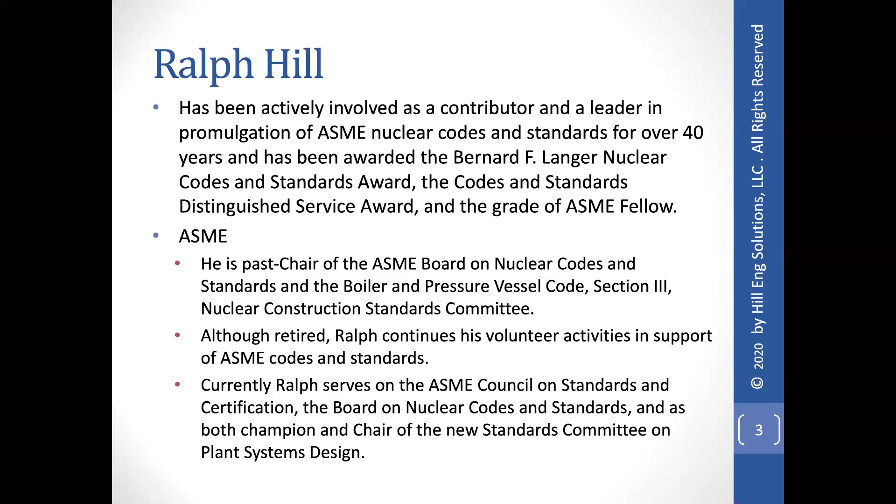Currently I'm on the ASME Council on Standards and Certification. I'm also on the Board on Nuclear Codes and Standards. And most importantly to me, where my heart is, I'm champion and chair of the new Standards Committee on Plant Systems Design, which is the subject of this presentation. In ANS, I've been a member of the working group on ANS 30.1 for a couple of years now, and 30.2 is being reconstituted, so I'm supporting that. And of course, I'm a member of RP3C.

Let me start off. I've been a champion of risk-informed lifecycle design concepts for over 20 years. And considering the many initiatives today and in recent times to support advanced plants, I think the time to implement risk-informed lifecycle design concepts is now. Initiatives include the Licensing Modernization Project, the new NRC Part 53 that's just started out, as well as the ANS and ASME initiatives to provide standards that are more relevant to the unique and varied safety cases for the advanced plant designs.

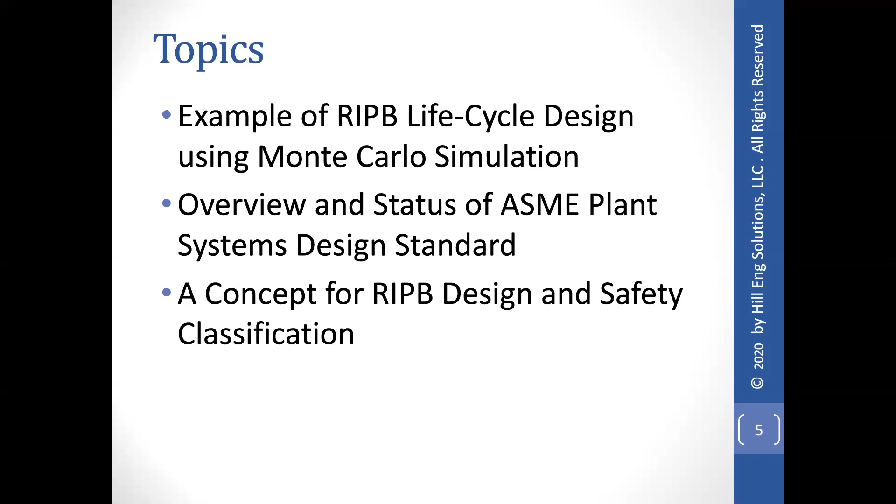In addition to providing an overview and status of the ASME Plant Systems Design Standard, this presentation is also my attempt to put some pieces together to provide a concept for risk-informed lifecycle design that also incorporates the risk-informed performance-based principles that Prasad has introduced.

So, first of all, we're going to do an example of where risk-informed design actually has been performed. This was done, believe it or not, 17 years ago. We used a Monte Carlo simulation tool called GoldSim for a very simple fluid injection system where the model and assumptions were out of the blue. They were good engineering estimates, but they're not relevant to any actual design parameters. And it's for demonstration of the technique only.

It shows how the system can be analyzed in a risk-informed approach. It's applicable to all types of systems of varying levels of complexity. And it can be applied at multiple levels ranging from entire system to a subsystem, down to the level where requirements are actually defined.

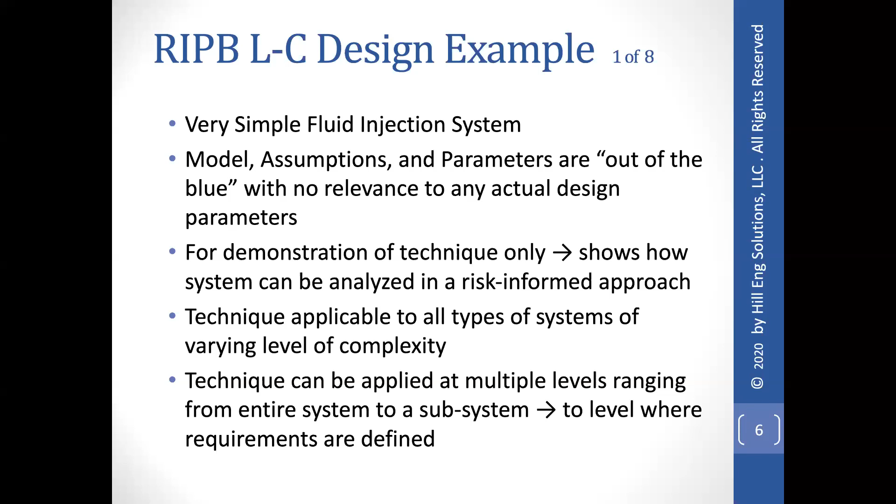So the top level requirement for this system, it's a fluid injection system, and you see the schematic here, is to be able to inject 200 gallons per minute with a mean reliability greater than 95%. On the left, you'll see the charging tanks with pumps and valves feeding into the injection tanks of 4 trains, with injection pumps and injection valves then feeding into the plant.

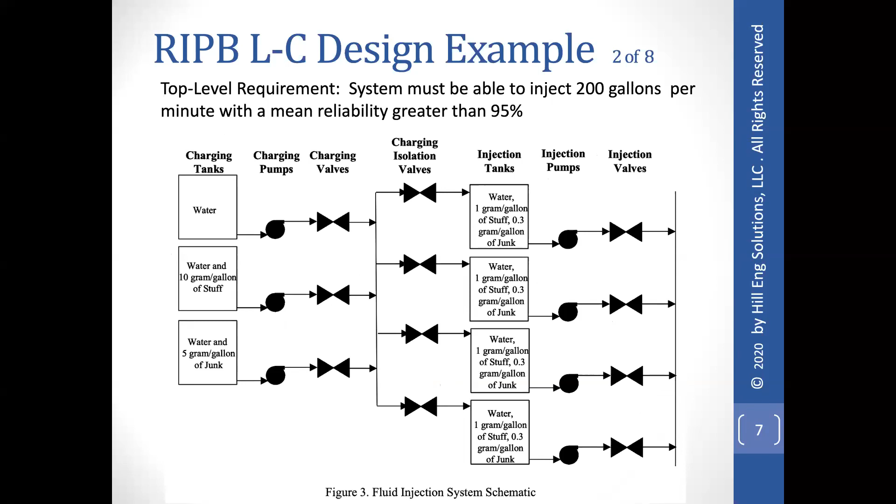So there's a number of general assumptions on component failure, modeled simplistically with Poisson distributions. The initial failure rate depends on component quality. Failure rate increases exponentially with time following any maintenance or repair. Doubling time depends upon the component quality. We have the pumps fouling at a rate that depends upon component quality again.

Maintenance occurs at selected intervals unless inspection reveals failure rate is above the target level. Inspection occurs at sub-intervals of maintenance intervals. And when inspection occurs, there's a probability that it misses the fact that failure frequency is too high. So, not totally unrealistic.

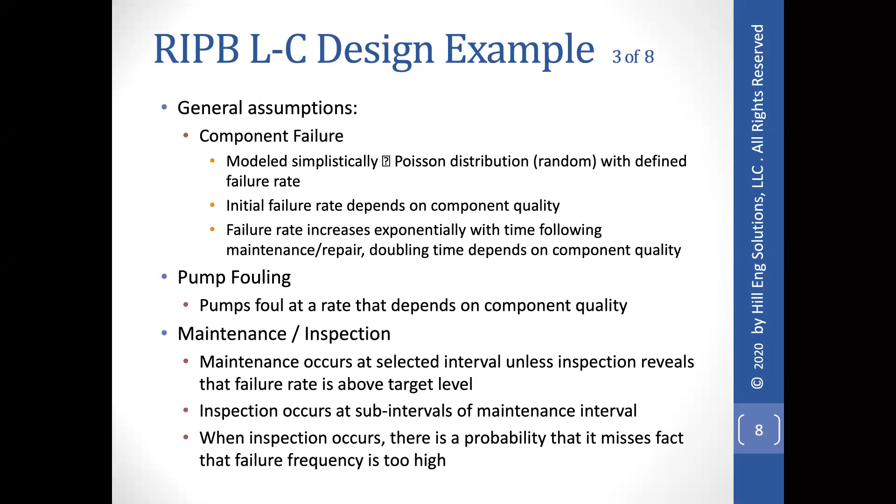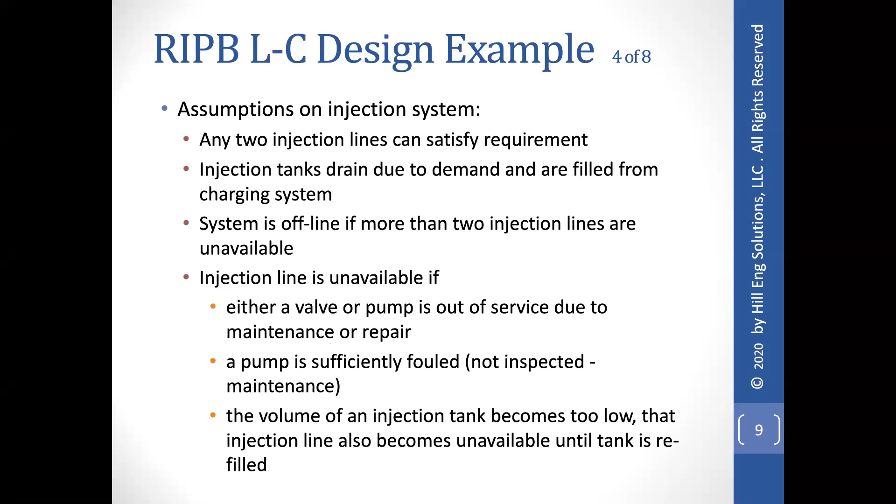In regards to the injection system itself, the assumptions: any 2 lines can satisfy the requirement. The tanks drain due to demand and are filled from the charging system. System is offline if more than 2 injection lines are unavailable. An injection line is unavailable if either a valve or pump is out of service, a pump is sufficiently fouled, or the volume of a tank becomes too low.

Then assumptions on the charging system: if any component is out of service, injection tanks cannot be filled. They can be out of service due to maintenance or repair. The charging pumps are also out of service if sufficiently fouled.

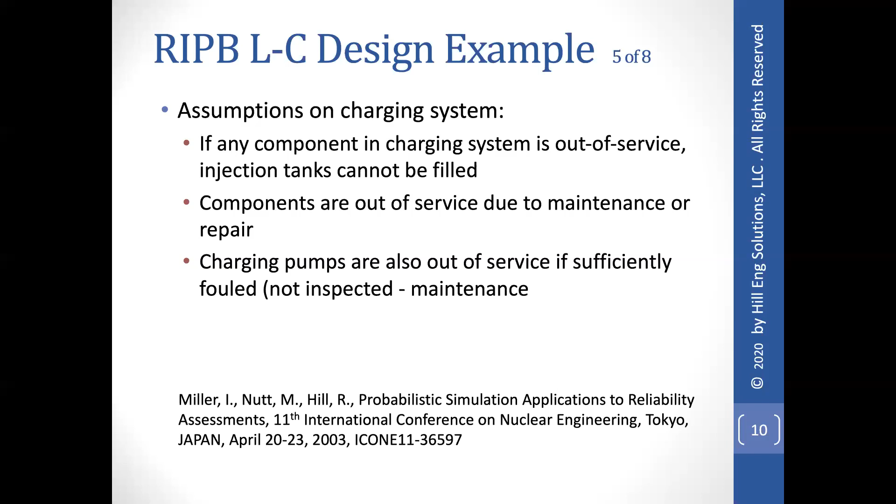I had to find a place to stick the citation for the paper where we published this. You can see we did it at the International Conference on Nuclear Engineering, ICONE 11, back in Tokyo in 2003. So, the model is still as valid today as it was then.

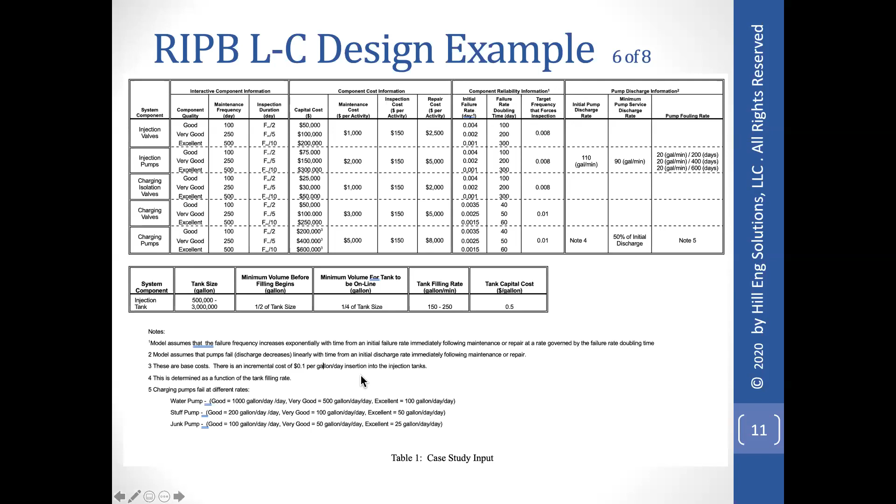So what about the results? The results are shown here. Again, at the top 3 rows, you see all component qualities were excellent, with different maintenance frequencies and different inspection frequencies. Injection tank volume was static for all 3, and input rate the same. Now you see your system reliability results.

For the first row with the inspection frequency of 50, we had 95.3% mean. Then we had 94.7% mean for inspection frequency of 250 days, and for a frequency of 25 days, 95.2% reliability. So the key here is that the choice of component quality and injection tank design parameters results in a system reliability that meets the performance regardless of the maintenance inspection intervals.

Remember, our initial performance criteria was 95%. However, there's still an approximate 50% chance of the system reliability being greater than 95%. An analysis of the results indicates that overall reliability is controlled by the reliability of the injection tank.

And then the following cases, which we won't go into here, consider larger injection tanks, and you can see you get larger mean system reliability results with larger tanks. So I think this very well illustrates the value of a tool like this in evaluating a system from a design standpoint, from a trade study standpoint — invaluable — and it also provides insights into the reliability of a system.

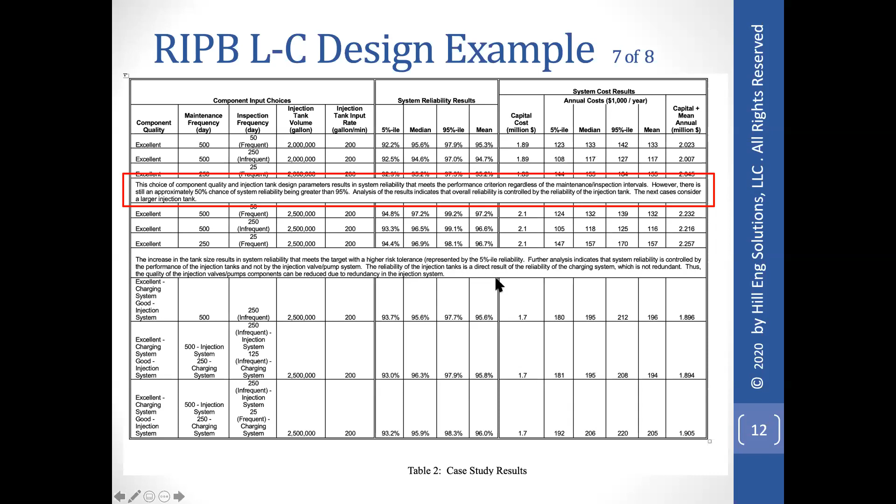So in summary, in this area, what do the results say? Excellent components, frequent maintenance and inspection, large injection tank can meet the goal with ample margin. But the case we looked at, the system would be over-designed, so it could have a significant cost associated with it that we might be able to save by looking more critically and refining the design.

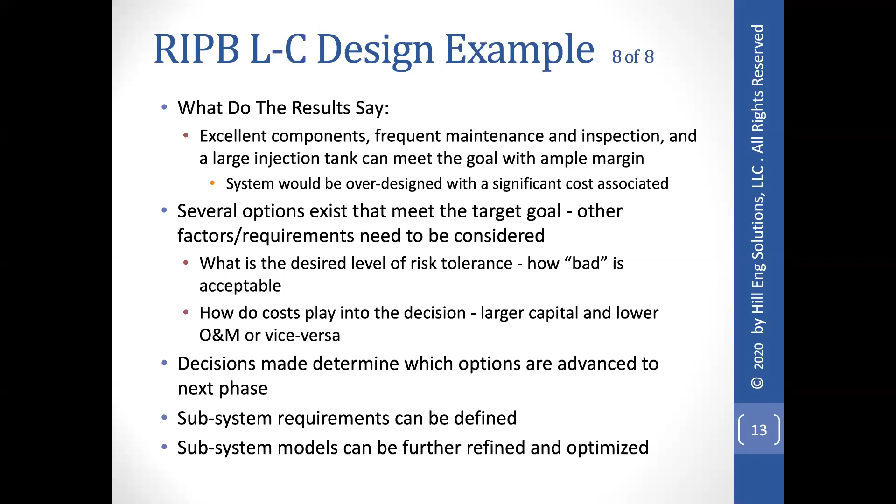So with that, I'll pause and take a couple Q&As before we move on.

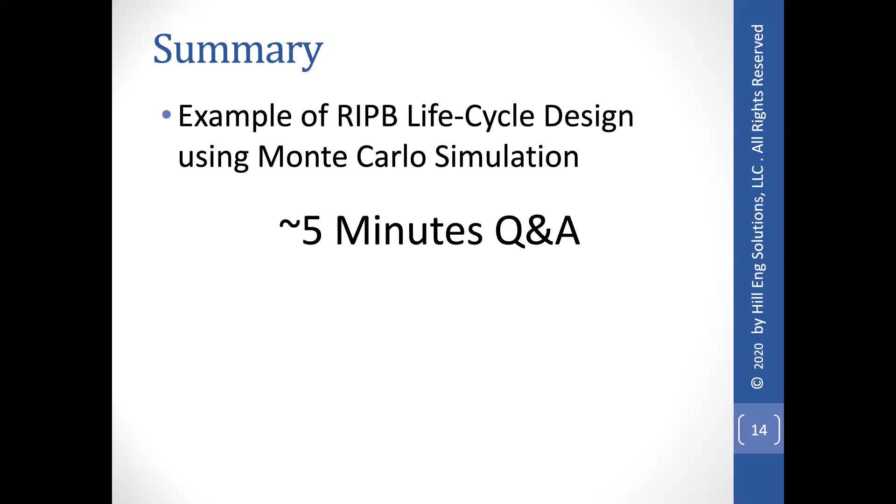So the next section we're going to look at is the overview and status of the ASME Plant Systems Design Standard. The problem we're addressing is that new plants and facilities with potential for significant environmental, safety, and health hazards to the worker and the public may not be built here in the US unless we can bring down the cost of license, design, and construct, while still ensuring safety of the worker, the public, and the environment.

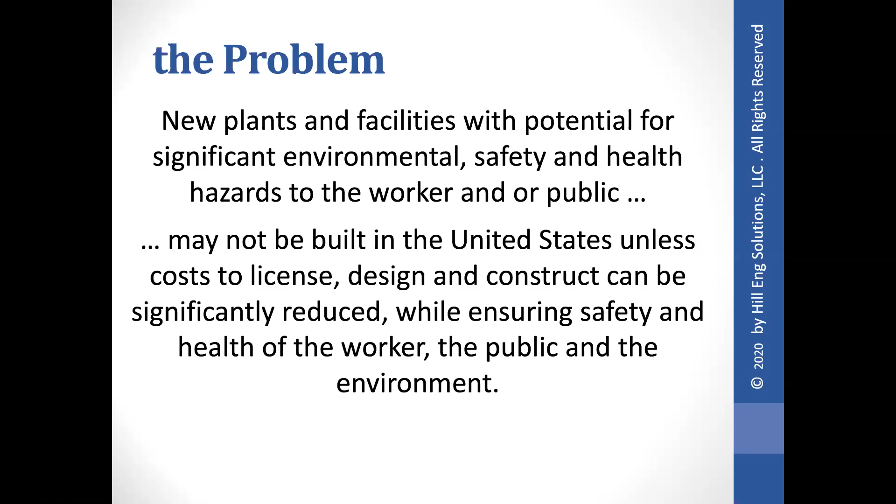When we talk about hazardous plants for the purposes of our standard, we're talking about plants and facilities that include nuclear, fossil power, chemical, petrochemical, compressed liquefied natural gas, hazardous waste, and perhaps others. So we're tech neutral, not just nuclear. And of course we're tech neutral within the nuclear community also.

So the solution is a tech neutral standard that provides a framework, including requirements and guidance for design organizations to do three things: conduct plant process hazard analysis in the early stages of plant design that advances as the design matures, and provide structure to the initial development of a quantitative risk assessment.

Secondly, incorporate systems engineering design processes, practices, and tools with traditional architect engineer design processes, practices, and tools. Thirdly, incorporate risk-informed probabilistic design methodologies with traditional deterministic design methods using reliability and availability targets.

And integrating these into a design organization's existing design processes and procedures. We're not telling them to throw out everything they've got. We're telling them to bring in some improvements to bring down potential costs.

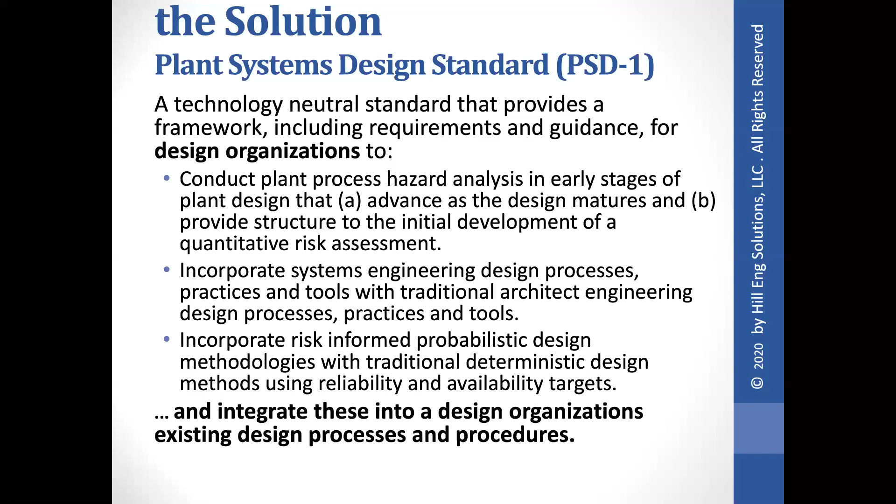We all know it's the costs in the final or detailed design stage - the errors we catch there, those we catch in construction or in startup and test or commissioning - those are the ones that cost us the most. So the focus of this standard is to bring down the potential for those errors to occur and thereby reduce the cost of construction.

Here we see an influence diagram that shows the relationship between the three technical areas in the standard in relationship to plant design. Remember, those technical areas were early hazards analysis leading to quantitative risk analysis, systems engineering, and probabilistic design.

So here you see systems engineering encompasses the entire process from pre-conceptual design through final design and support to construction, startup, and commissioning. That's the design, field change requests, things like that, feedback in, and we have to handle those.

The plant hazard analysis provides qualitative plant risk evaluations during early stages of design, supporting the quantitative PRA or QRA or PSA analysis in later stages of design.

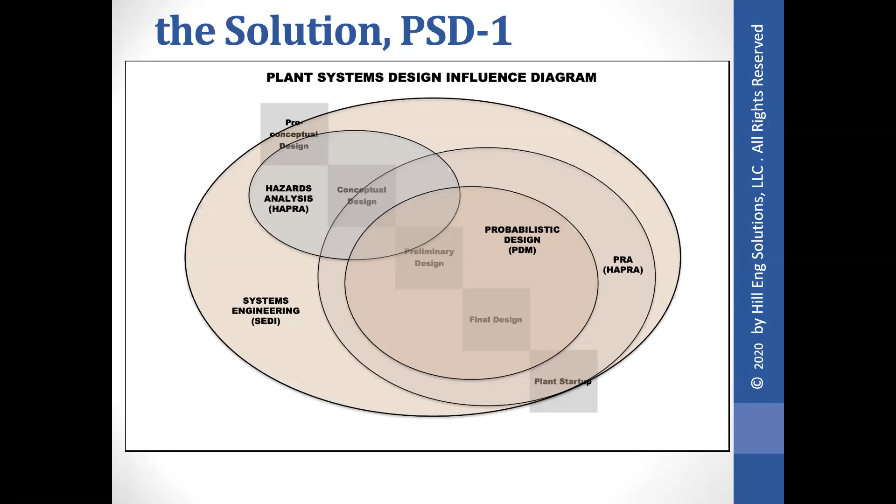And the probabilistic design methods has the greatest applicability in the later stages of design, probably really more in final or detailed design. And all three technical areas support field changes during construction, startup, and commissioning.

So the objectives are safer and more efficient designs and design alternatives with quantified safety levels. Now, in the past, or with current design techniques, ASME code, et cetera, we can't quantify the risk of one system design versus another, or the risk of the plant.

But using the type of Monte Carlo simulation we showed at the beginning of this presentation, we can start to do that.

More effective requirements management - in my experience, over 40 plus years in the industry, that's an area where typical architect engineer processes have fallen down. These would include assumptions, what we call TBDs - to be determined - and TBVs.

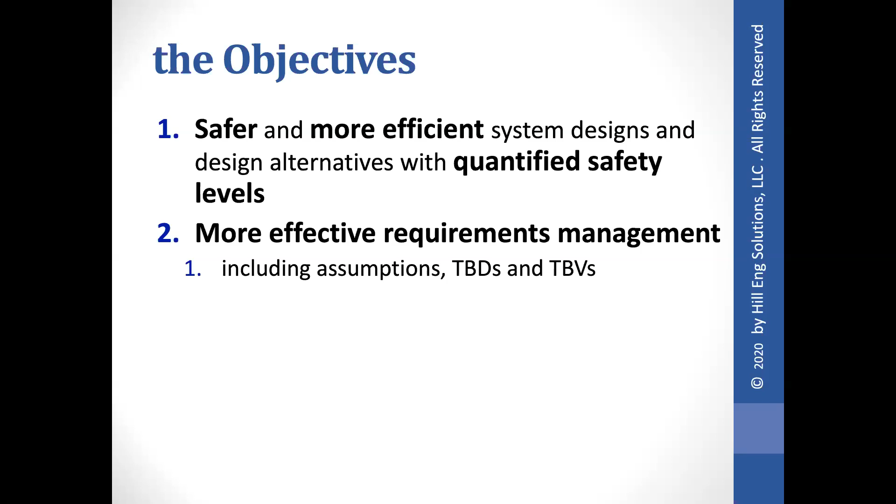So you have a high level specification with a piece of information that is either an assumption or we're not sure about it or needs to be verified. Tracking those things through the myriad hierarchy of documents we developed during design has sometimes been very difficult to do.

Covering the entire life cycle of a plant design: construction, operation, decontamination, and decommissioning. And be system-based versus component-based, and inclusive of multiple disciplines: mechanical, electrical, I&C, et cetera. Typically, ASME standards have not been system-based, they've been component-based.

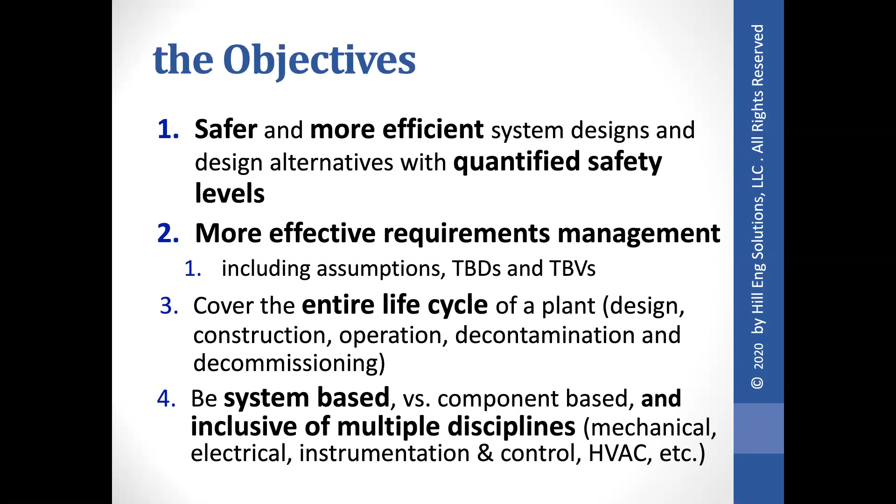Now, there are a number of related initiatives, of which what you see on your screen here is just a few, to what we're doing with the Plant Systems Design Standard.

We already mentioned Licensing Modernization Project, NEI 1804, Reg Guide 1233, Part 53, the risk informed safety categorization process of 50.69. ANS has a number of standards, including 30.1 and 30.2. The EPRI body of knowledge talks about evolving through hazard analyses, evolving to support as building blocks for PRAs.

The ASME Board on Pressure Technology Codes and Standards, covering Section 1, Section 8, and so on, has a task group on risk-based design that's identifying areas and recommendations for Section 1 and Section 8 to incorporate risk-based design into their standards at some point in the future.

And then Section 11 of the ASME Code for in-service inspection, Division 2, which is fairly new, about a year or so old, has the RIM program, or requirements for reliability and integrity management for nuclear power plants, that also is risk informed.

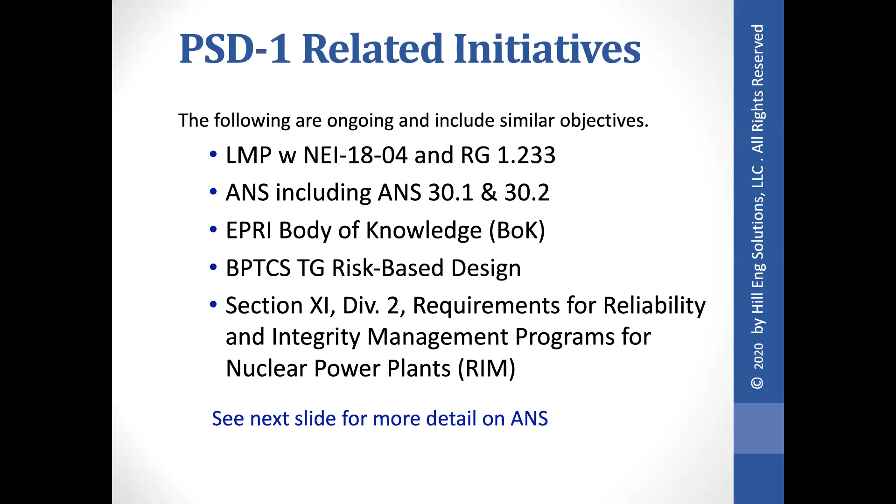Now, relative to the ANS, they're developing a series of standards to support new plant designs. This graphic shows the three top level standards, addressing risk and performance objectives, categorization of structures, systems, and components, and risk-informed decision-making. They provide requirements and guidance to the next tier of standards that address reactor-specific designs: fluoride, salt-cooled, liquid molten salt, helium-cooled, et cetera.

At the very bottom of the graphic, you'll see reference to other standards, including cross-cutting topics. This is where the Plant Systems Design Standard integrates into the ANS standards development planning, as shown in this figure. An architect engineering firm would use the applicable ANS standards in conjunction with the Plant System Design Standard.

Now, I do recognize this slide. I got it from Mark Linn about 18 months ago as part of ANS 30.1, and it's old and probably not current, but I think the message here is very relevant.

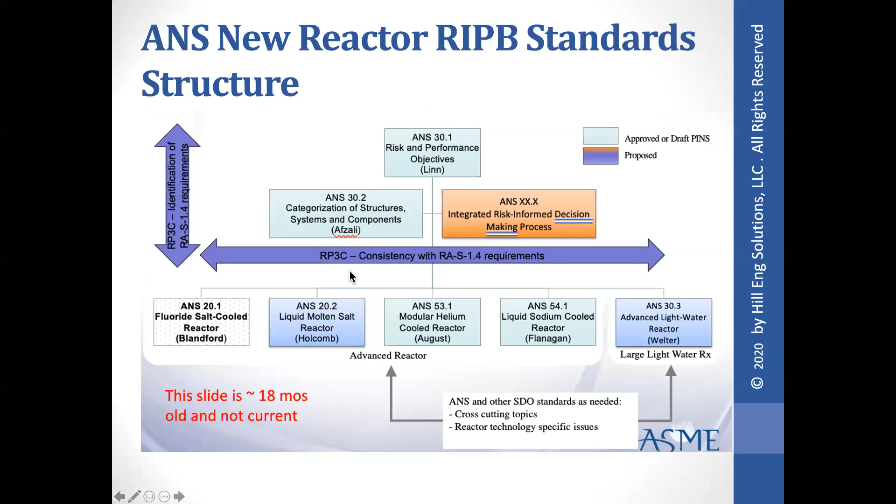The focus of our first year with the Plant System Design Standard has been detailed planning. By the way, we got approved as a standards committee in July of 2019, so we're a little over a year old. Our first year was detailed planning of the content, spending the whole year planning what the content was going to be around those three technical areas, doing brainstorming sessions and developing a roadmap for each of the three technical areas.

The roadmaps and process flow diagrams were used to develop work breakdown structured data sheets with descriptions of each part of the standard and identification of inputs from and outputs to other parts of the standard. So we did all this detailed planning. The block flow diagrams and N-square diagrams are being used to integrate activities within each technical area and to integrate the technical areas together.

In the past months, we have been importing this information into InnoSlate, which is a model-based systems engineering cloud-based software tool to plan and organize the contents.

I probably went a little bit too fast. Progress to date: we are essentially complete with planning each of the three technical areas and are doing final edits to the planning information we imported into InnoSlate.

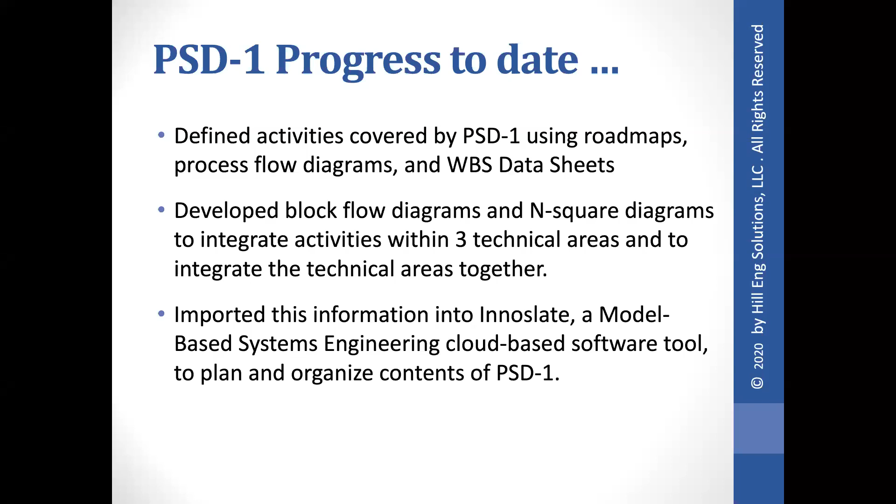A few months ago, volunteers began writing the first sections of part 2. Results are being used to provide guidance to other working groups. As of today's presentation, initial drafts have begun in all three technical areas, so we're beyond just our planning stages—we're actually starting to write in parallel with finalizing an integrated schedule.

Let's see, I got out of sync here a little bit. Okay, so...

Again, back to InnoSlate, the software tool that we're using. It enables us to better identify the interrelationships between different parts of our standard, as we mentioned. What you're seeing here is an InnoSlate generated action diagram. Here, where you see the acronym SIP, it stands for Site Infrastructure Plant, which is the highest level we use in our taxonomy for the standard.

Plant level of requirement. The green shaded parallelograms represent inputs to or outputs from the blue shaded activity block. So this is actually a part of the standard that we will be writing and started writing in the area of hazards analysis and evaluation.

In the early conceptual design development stage, after we receive the contract technical requirements, et cetera, we identify the hazards and causes, develop the event sequences, evaluate the event frequencies, the consequences. We identify barrier functions to either prevent or mitigate those consequences. We characterize those risks, and obviously there's do loops in this process. And then we validate those risks.

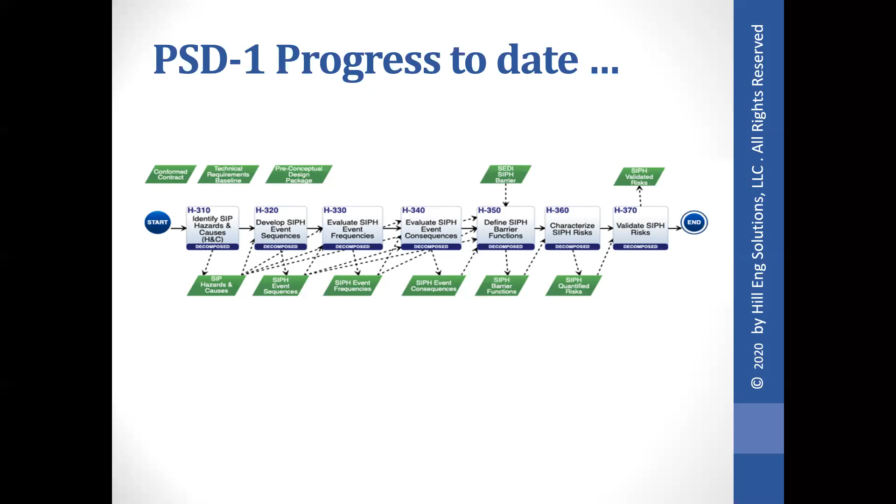The output from these activities feeds into the functional baseline, which is then the basis for the next stage of design development, which you can think of as preliminary design or development of the allocated baseline, if you are familiar with that terminology. So this is typically the way we planned our work and how we'll be writing sections around each one of these. And you can see there, each of these is decomposed into more detail also, and covered in the descriptions and material in the standard. And I already covered this.

So we'll now talk a little bit about the structure of the standard, looking at the process overview, our taxonomy and baselines, our hierarchy of documents and products, a little bit more on use of Innoslate. I want to show you an example of the Part 2 content and show you the section in Part 1 that discusses risk-informed performance-based design.

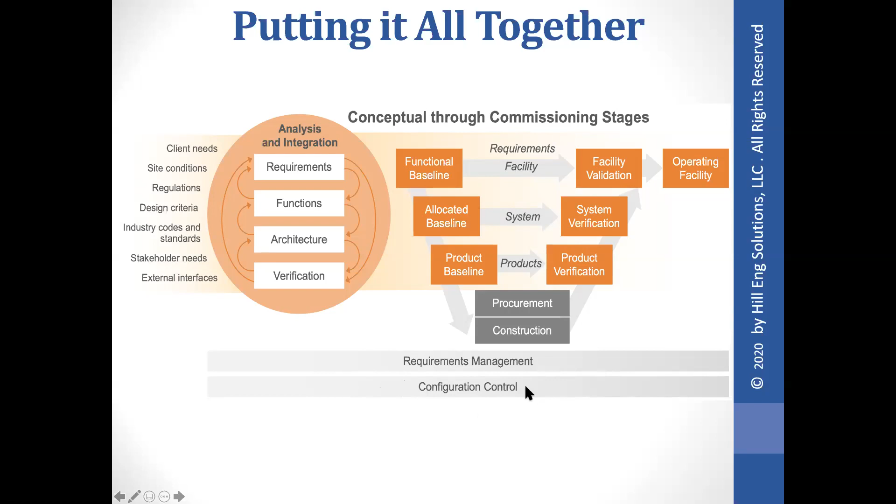Now, all of this work is underpinned by good requirements management and configuration control. And the standard is not going to talk about these programs. It does talk about the fact that they are necessary for a successful project. But as with any standard or any product we try to produce, we have to put boundaries around it. And these are not included in the content for the boundaries of our standard.

Now, although the systems engineering process graph might look familiar to you applying systems engineering to traditional systems, we're using a little different taxonomy. We found it necessary to develop this taxonomy because we're technology neutral. We're going across petrochemical, nuclear, pharmaceutical, et cetera. So they all have different terminologies and taxonomies. So this is what we're using for this standard to cover a whole range of hazardous type plants.

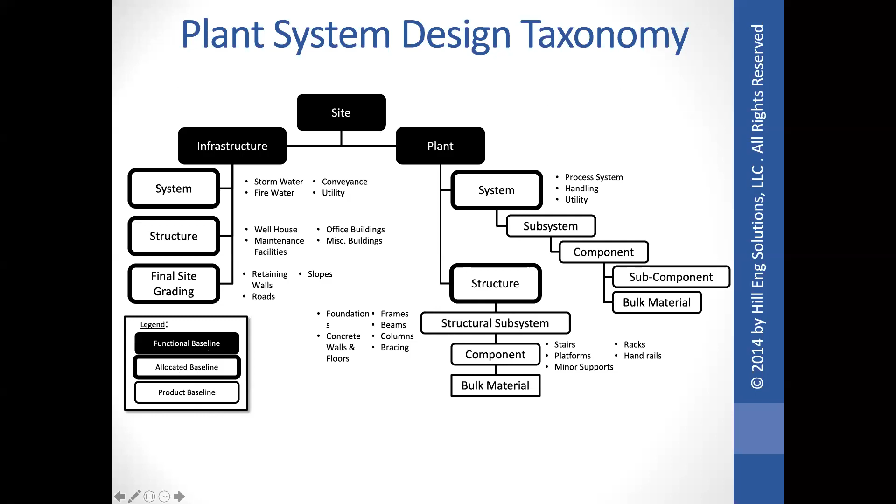Defining, specifying, and architecting the site, infrastructure, and plant levels are the focus of the functional baseline. So you'll see they're shaded in dark black. The system structures and site grading are the focus of the allocated baseline, excuse me, sensitive mouse there, which is outlined in black. And specification and design of items that are fabricated or constructed are the output of the product baseline, which is not shaded. Some examples of these are included in the slide.

Please, oh, I went up one more. My finger is too fast for me.

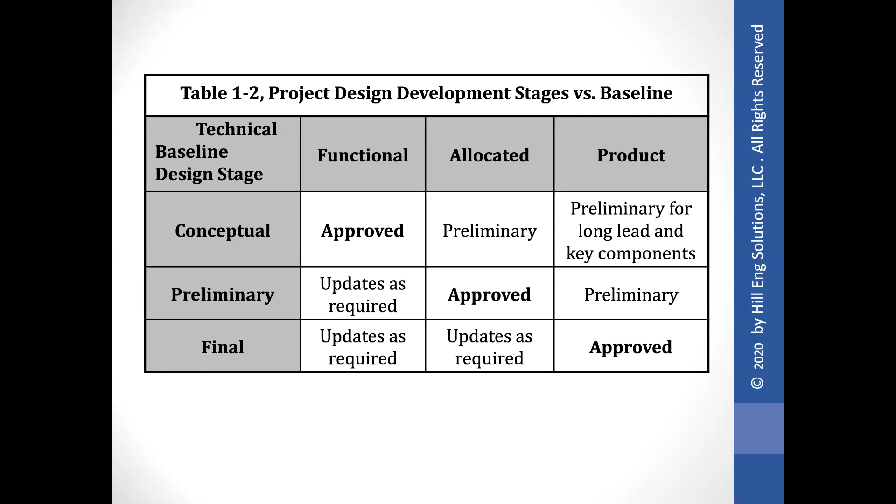So we're using this model-based systems engineering tool to do the following: develop the functional diagrams that represent the project processes that will be addressed in the standard, show the interrelationship among these processes and associated document sections, and collaborate with all the authors, regardless of where they are on the globe or what time zone they live in, making all the information transparent to all the authors, and providing a standard set of terms, taxonomy, and way of representing data.

And then we're actually going to write the sections in the tool. Our initial sections we're writing in Word and importing into the tool. But as our working groups get more familiar and we settle on our format and the types of content and guidance for each section, so it reads as if one person wrote the whole standard, then we'll start writing in the tool itself.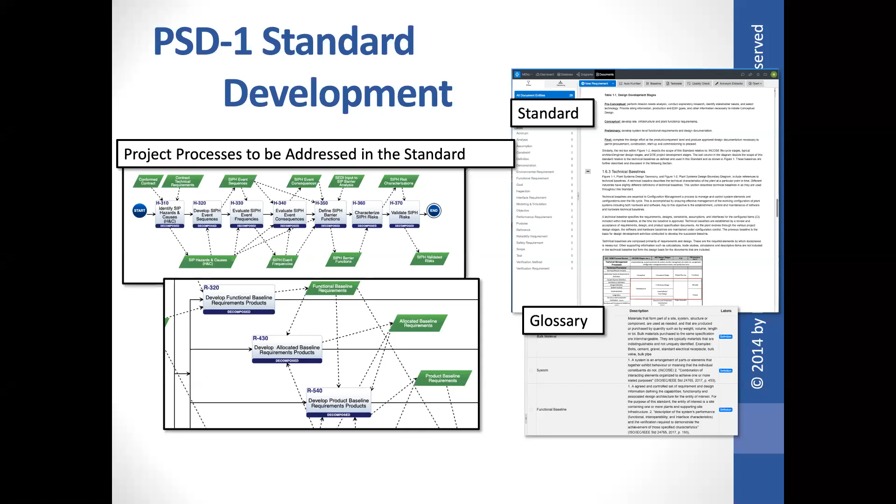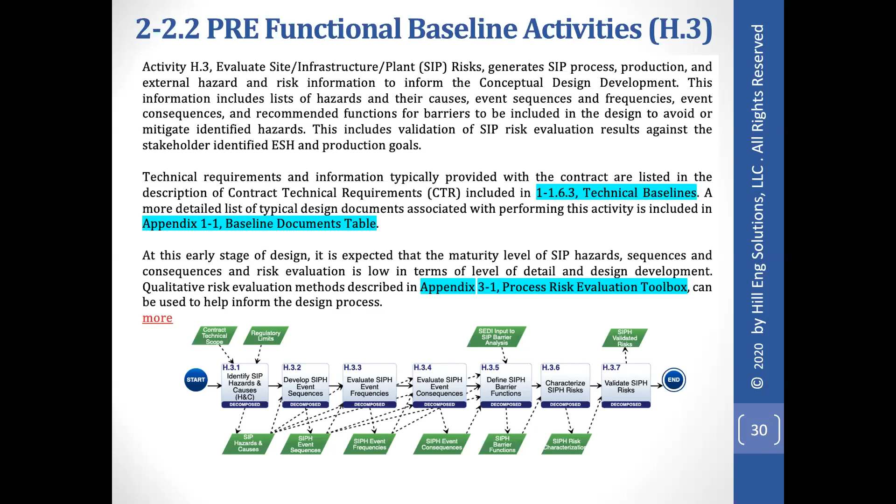This is an example from part 2 of the standard. Each activity has 3 elements: descriptive and informational text, as you see here, with no shoulds or shalls. Then we have the action diagram, and below that, the table containing the requirements related to performing the activity. So all requirements in our standard will be in tables, so a user doesn't have to hunt through looking for shalls, shoulds, and mays. They'll all be in tabular form. It also makes it easier for the volunteer authors to ensure everything is integrating together.

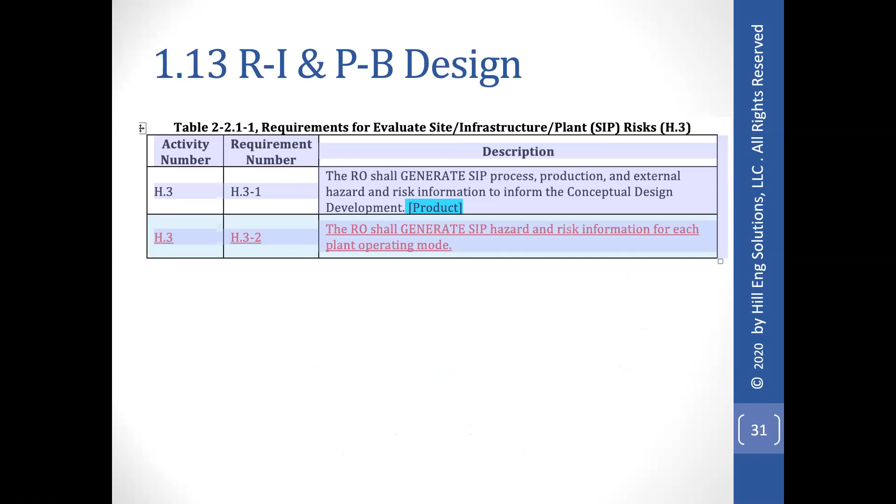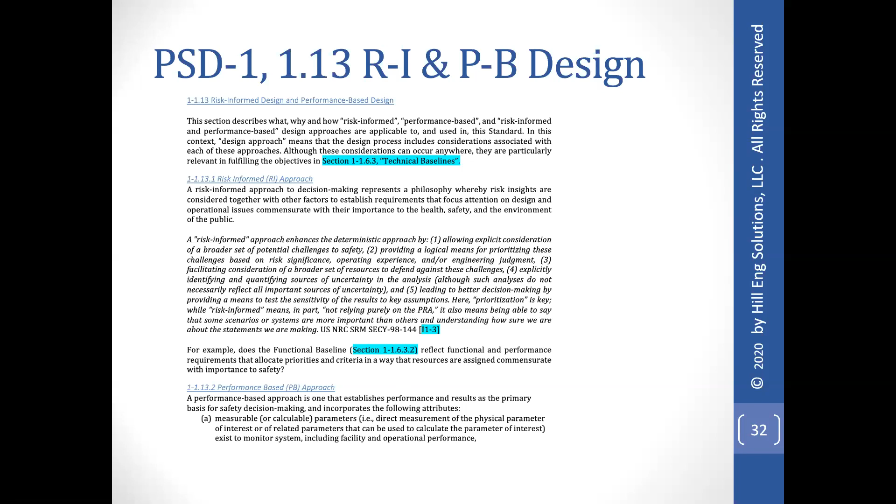So section 1.13 of the standard describes what, why, and how risk-informed, performance-based, and risk-informed and performance-based design approaches are applicable and used in the standard. Prasad Katami and I are the authors of this section, Prasad doing the bulk of the work, and I thank him for that. We obviously don't have time to go into this, but it's available for those who may be interested. We can share this with RP3C committee members and others. So that's a summary of the overview and status of the Plant Systems Design Standard.

Well, again, we'll devote about 5 to 10 minutes now for Q&A. I think we're doing okay time-wise. Ralph, you have accumulated quite a few questions. I'm going to start with the first question, from an anonymous attendee: is there any consideration in the model for condition-based maintenance and inspection versus time-based?

Yes, we intend to cover all the entities. Right now our intention is, and we're looking for volunteers and input to help us, to have sections that describe the importance of the entities and identify where they are brought into design. The systems engineering integration portion of the standard will focus on that. One thing we recognize is we need to do a better job in design to bring down the costs of construction and operation, through better consideration of operability, maintainability, and availability. It's the focus of the standard.

We're not even looking just at reliability. We're looking at availability, which includes both reliability and the ability of the plant to achieve its function or its objectives in product throughput and output. So yes, those are very important in the standard. Thank you. The next question is from Pamela Nelson. She asks, do you use an optimization method in the Monte Carlo simulation?

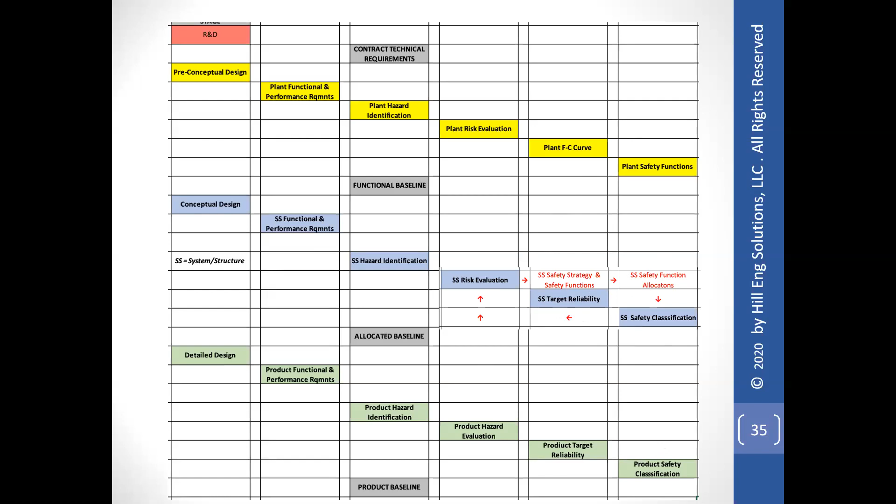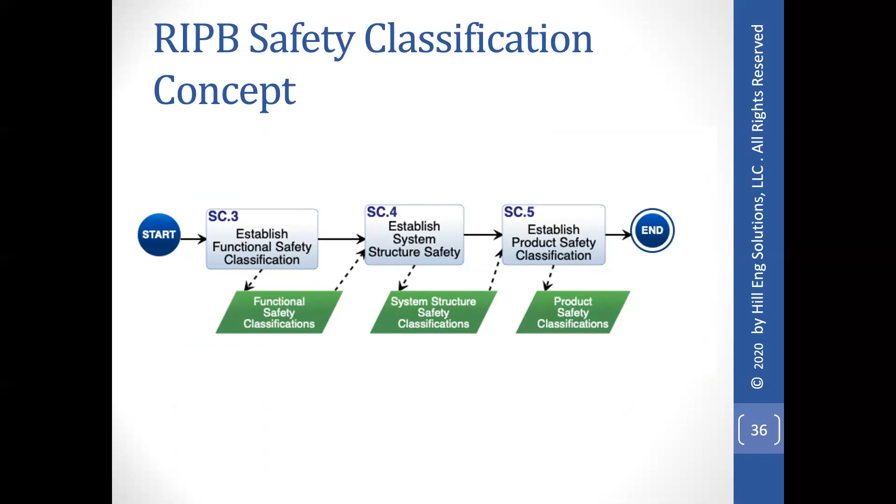But in regards to input and feedback, just at a higher level view, again, looking at what we can do with tools, we established a functional safety classification as a basis for the system structure classifications and as a basis for the product level safety classifications. And then again, there are feedback loops you don't see here. So

Kent Welter is a colleague I have a lot of respect for. So after I put this concept together at 5 o'clock in the morning, I sent it to him and asked for his feedback, and we had a good discussion on it. And one of the things identified, which he sent off to the RP3C committee members, is this ONR guide, Office for Nuclear Regulation, on categorization of safety functions and classification of structures, systems, and components. And lo and behold, it has a lot of resemblance to the concept that I had come up with and shared with Kent, and I'm sharing with you today.

Three slides I'm going to show you quickly. We're not going to go into detail. They illustrate that at least one regulator understands and recognizes the relationship between risk-informed performance-based principles and how to implement those principles using good systems engineering practices. Now, again, we're not going to discuss them. We don't have time, and I'm not that knowledgeable of the guide because I got it from Kent yesterday, I think.

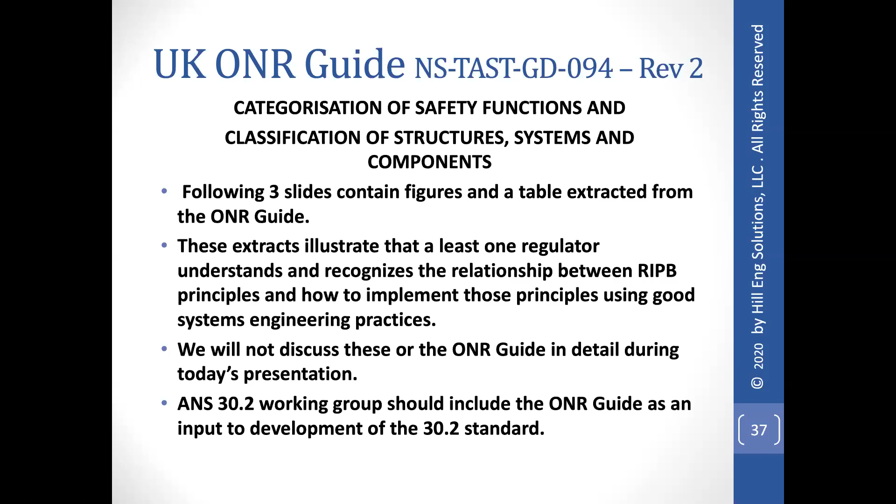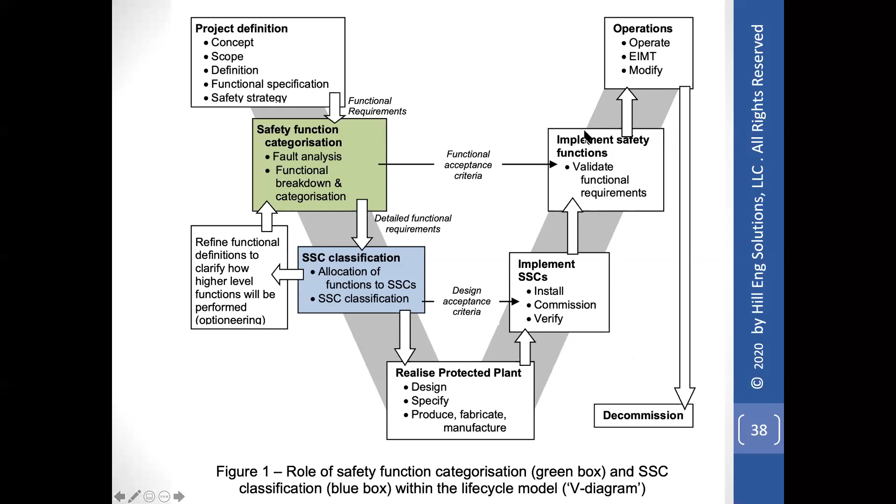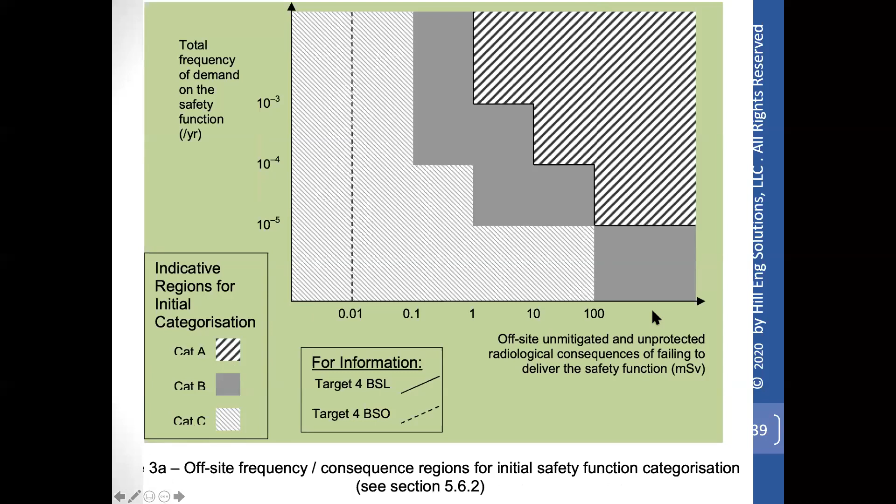They're also looking at your frequency consequence curves, where here your high frequency, high consequence are Cat A, the intermediate is Cat B, and low is Cat C. They're using those types of concepts to develop failure frequencies and probabilities for your safety classes. So failure frequency of this range is class 1, probability of failure on demand. If we need that pump or that train or that system to be online, what's the probability of failure? If we need it to have a very low probability of failure, we make it class 1. Intermediate, class 2. Now we have values, and these values we can use to design to.

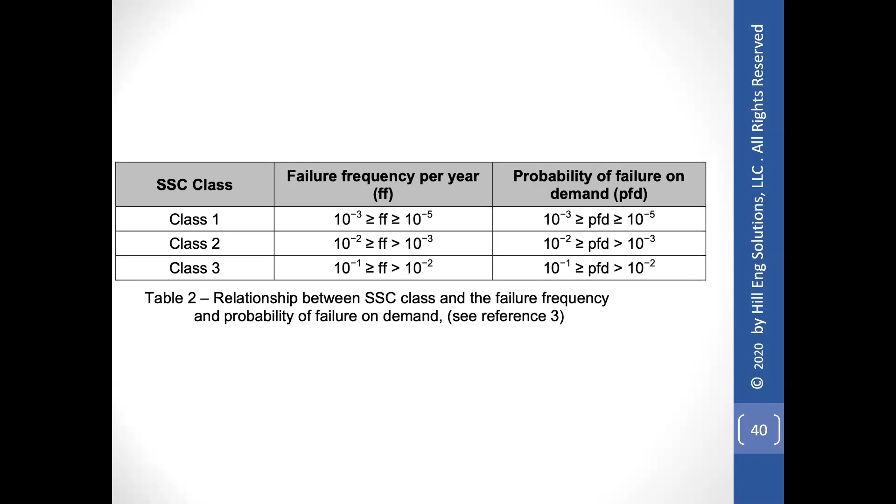So back in that Monte Carlo simulation at the beginning of this presentation, we had target reliabilities. Well, that's an inverse of failure, right? So now you can take values like these to establish what those should be for different systems based on the criticality and based on the risk identification, risk evaluations, mitigation strategy, et cetera, we developed during the design process that we showed you the plant systems design is doing.

So in summary, we've done an example of a life cycle design using Monte Carlo simulation, risk informed. We've given an overview and status of the plant systems design. I've shared a concept I have, and I find out that to some extent the UK guide implements and validates the concept that I came up with. And so with that, we'll go to final Q&A and discussion.

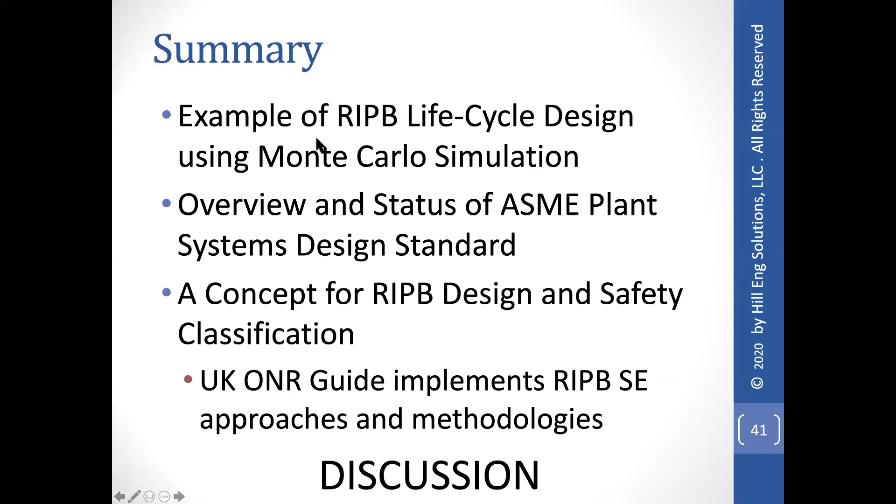Thank you very much, Ralph. I think you covered a lot of ground there. And the fact is that a lot of this, as you said, is brand new. And the ANS has a very active working group on safety classification, and that is ANS 30.2. And as I say, we just got started. We've had one very active conference call, and we intend to meet regularly every 2 weeks. So if people are interested, just let us know of your interest. Kent Welter, Don Spellman, and I are sort of taking the lead on this.